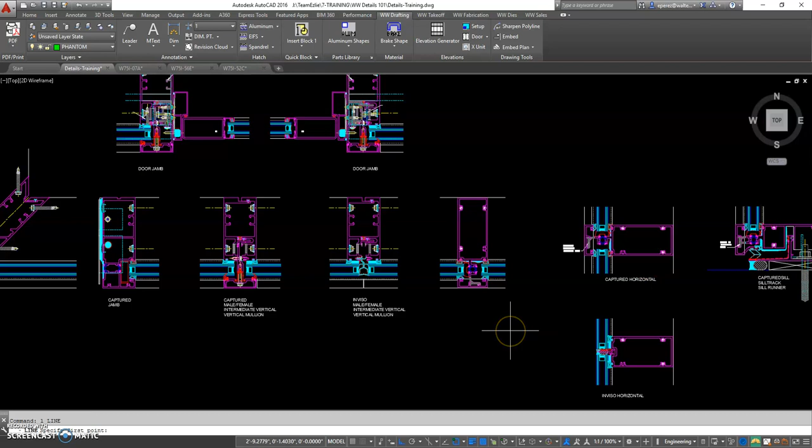So what I did here was take our captured horizontal and rotate it so we could see how it aligns and mates with the vertical members. For visual purposes, I'm going to draw a line showing what every line represents on the verticals, and then we'll do the same vice versa on the horizontals. I'll show you what I mean.

Okay, so this is our horizontal, rotated. It should line up in the back to our verticals, so I'm just going to draw that line there. That's the back of our system. You'll see that the actual part of our horizontal is actually a bit smaller than the back of the system. This is correct.

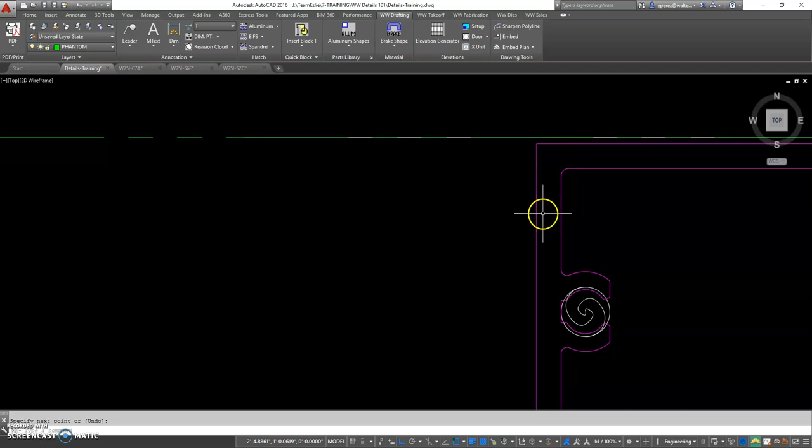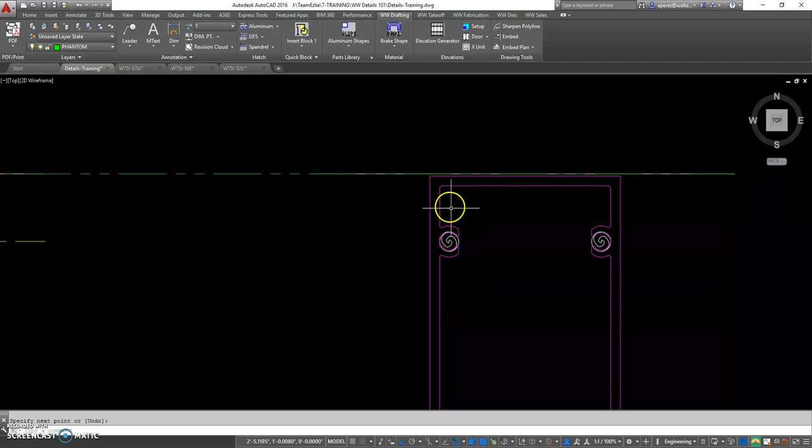This is a design intent, so that this allows for a little bit of wiggle room in assembly, as well as die tolerances, so that this horizontal will never exceed and stick out past the verticals. So this is correct, this is on purpose. It should be 0.02, I believe, is the number we typically have as an offset.

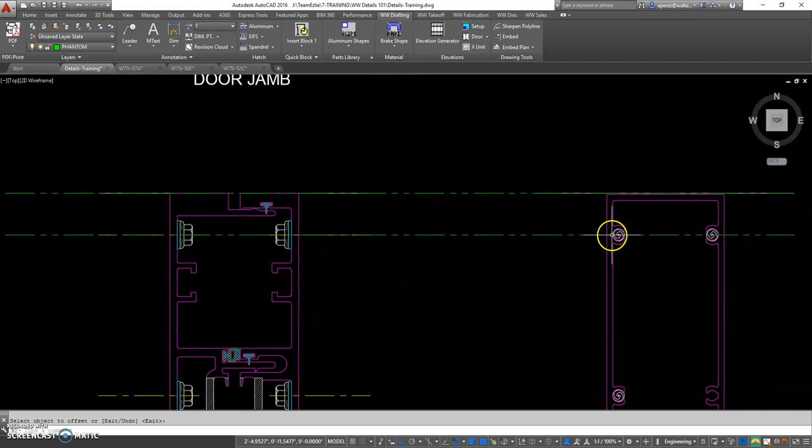Now I'm going to offset this line to the assembly screws, going to the center of our screw raceways. Okay, so that is our assembly screws. That should align with these on our verticals, because that's representing this screw attaching this horizontal through this screw raceway. So if I go across all the verticals, those screws should align, and that's how we locate those.

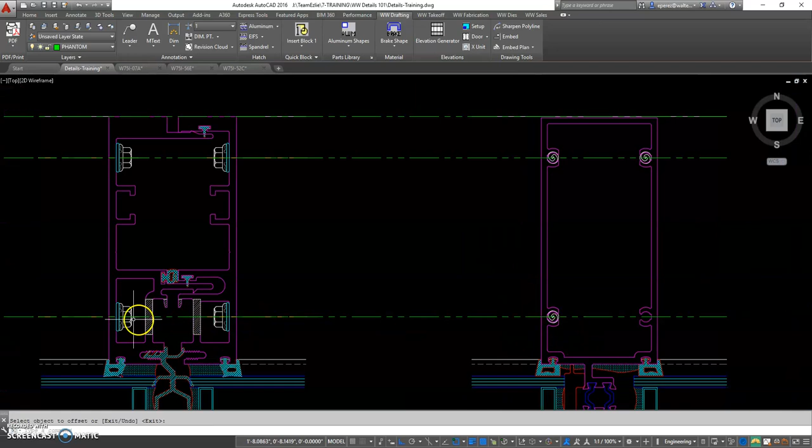I'm going to do the same for the next screw raceway. Okay, and those all should align as well, going across. So that's how the assembly screws are located and why we see these two in a vertical view. Typically our standard is to attach with 2 screws.

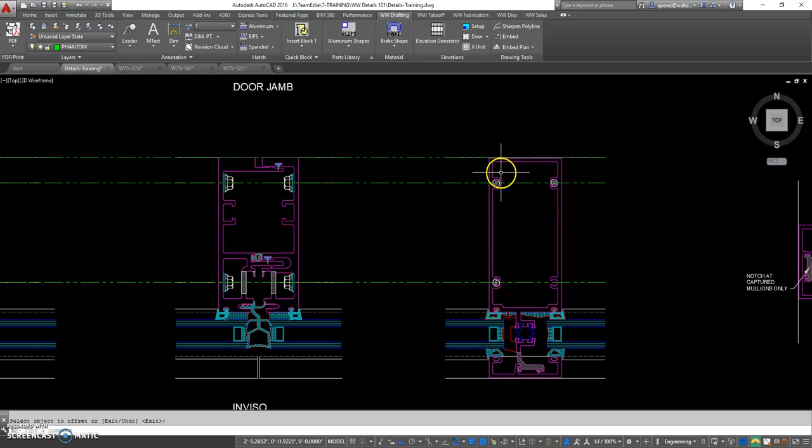The next line you should see is the back of pocket line. If I offset through to the back of the pocket, remember it's right here, the edge of the extrusion. Okay, so that's the next line you see.

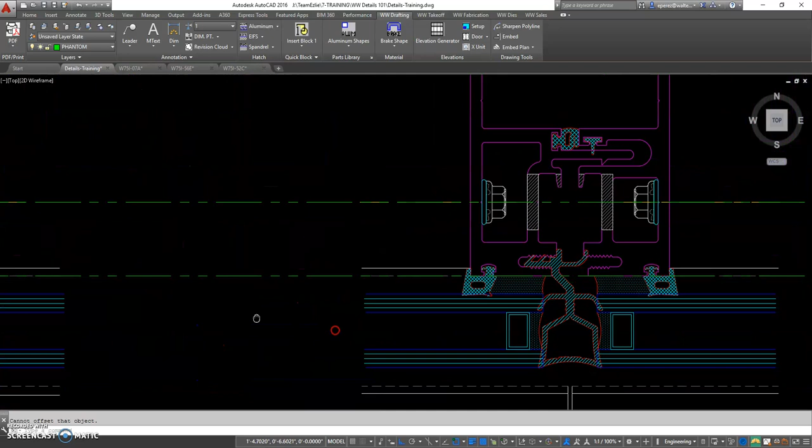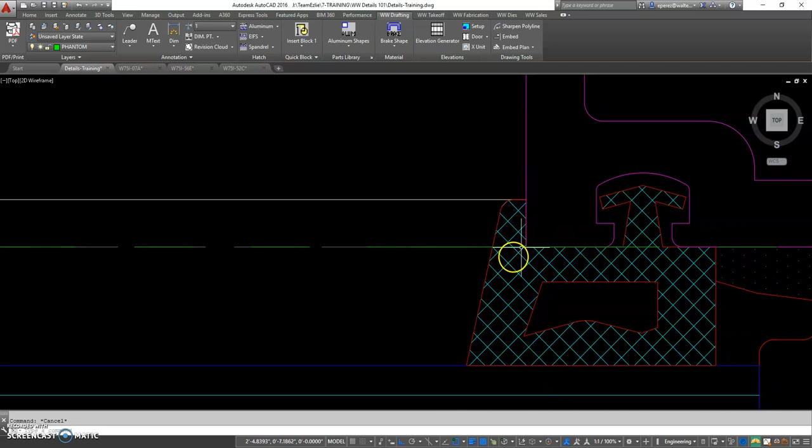Now we're showing them as a hidden line in our details. The reason for that is you see these gaskets here, these back gaskets. They have on them what we call a trim lip. This little trim lip is technically installed on top of the horizontal member, the die. So really, the back of pocket is hidden by this gasket.

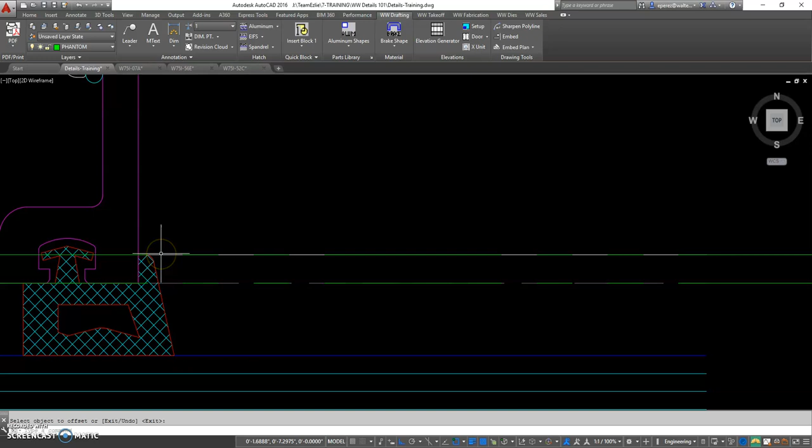So this is why we show it with a hidden line. Then this line here that you see in white is an actual line representing this gasket trim lip. If I offset my construction line to that trim lip, that will align on all of our details, as you can see. So that's why you see that solid line back here, and then a hidden line represents the back of pocket.

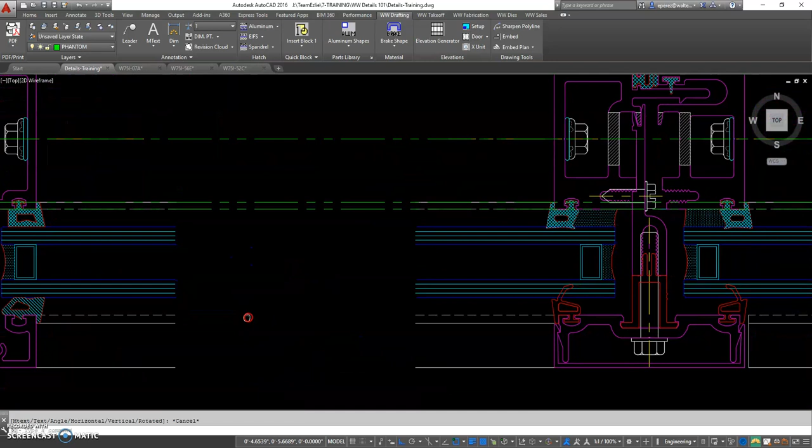Our standard dimension from back of pocket to back of glass is 1/4 inch. Right now, that's our standard, and that should never change. But I can only say never once, because sometimes that does change, but our standard is 1/4 inch.

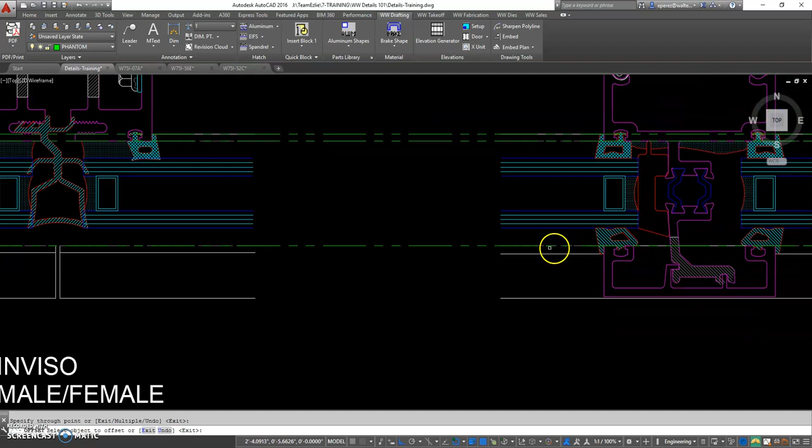Okay, so same with the front. If I offset my construction line now to the face of the pocket, again, it's shown as a hidden line because horizontally we have this trim lip on the gasket. So you have a hidden line for the pocket and then a solid line for the trim lip of the gasket. That's what we're seeing horizontally.

Our standard dimension from back of pocket to front of pocket for 1 inch glass is 1.5 inches. That's our standard. So 1/4 inch plus 1 inch plus another 1/4 inch gives you 1.5 inches. That's our standard.

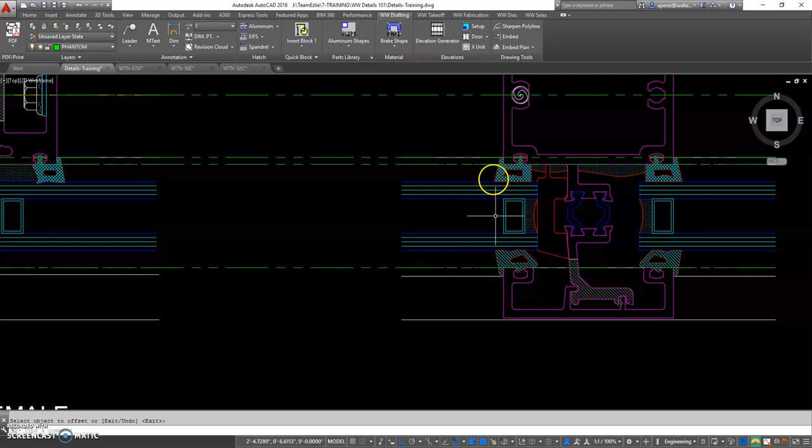Okay, and then the next line would be the face of system. So again, I'm going to offset to this line, and again, you'll see our horizontals are purposely short. That is on purpose, that is intentional.

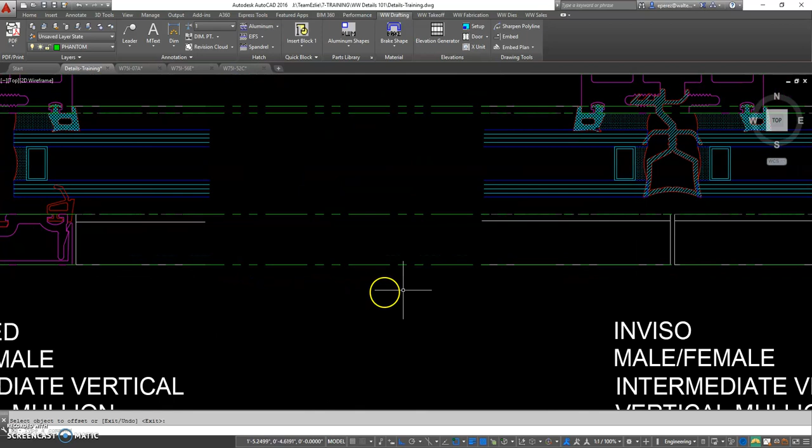Face of system is typically at our verticals' face, which is truly 7.5. So face of system is driven by the vertical face and back of system. Our vertical mullions are driving the overall system depth. So our standard is 7.5 by 2 3/4.

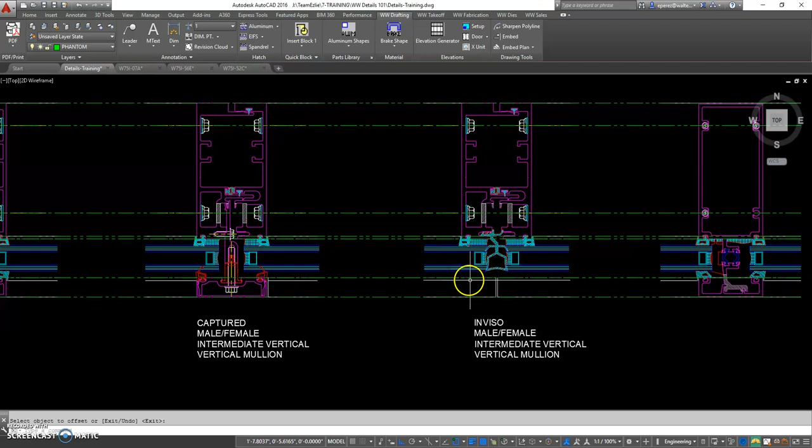Okay, now on the Inviso, you'll see there's some extra lines here. These lines represent the splice of this horizontal cover, face cover. When the two units meet, we leave a gap.

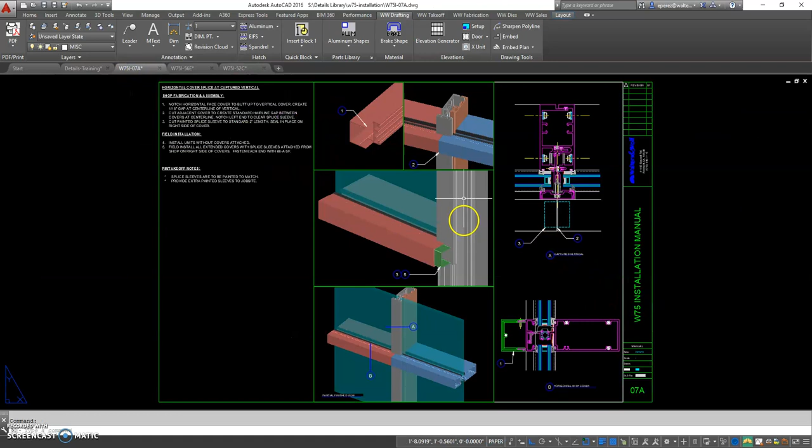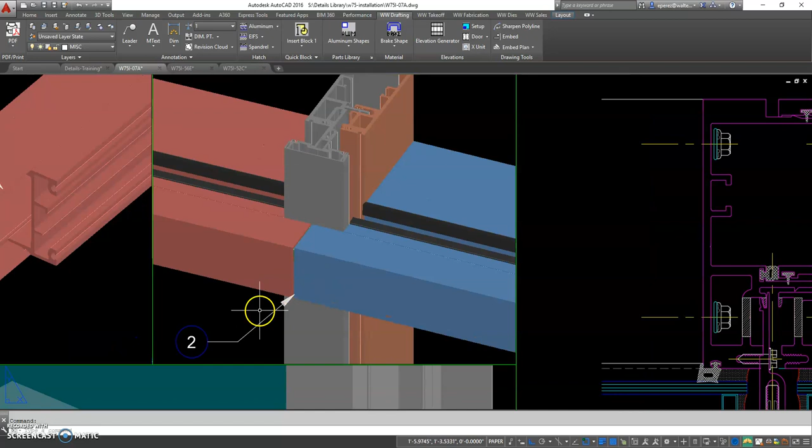So I have this little ISO of a deeper cover, but the same concept applies. You can see this cover in my vertical view, looking down on it. Here's that cover, and there's those lines, which represent this finished little gap we leave. That's our standard, so we show it in our 2D details, so everyone knows there will be a little gap from the face horizontally. That's what those lines represent.

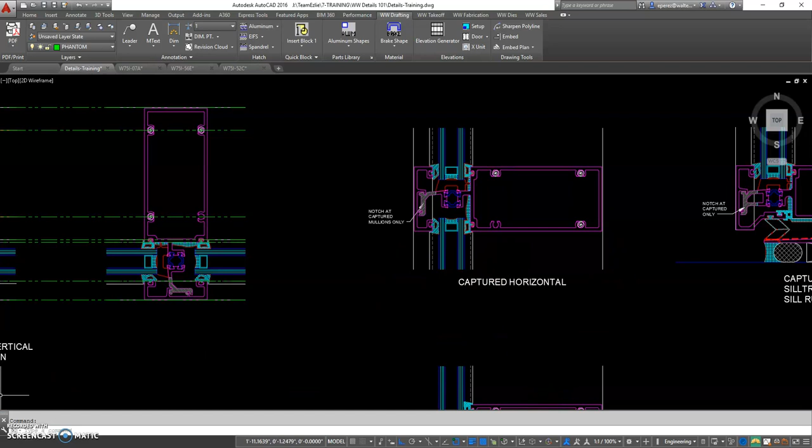Okay, so now that we did that on our horizontals, I'm going to pause and then we'll jump and do the same thing with the verticals so you can see how those lines align with our horizontal details. So now I did the same thing. I took our vertical detail and rotated it sideways so we could see how it aligns with our horizontal details. So again, I'm going to start with the back of system.

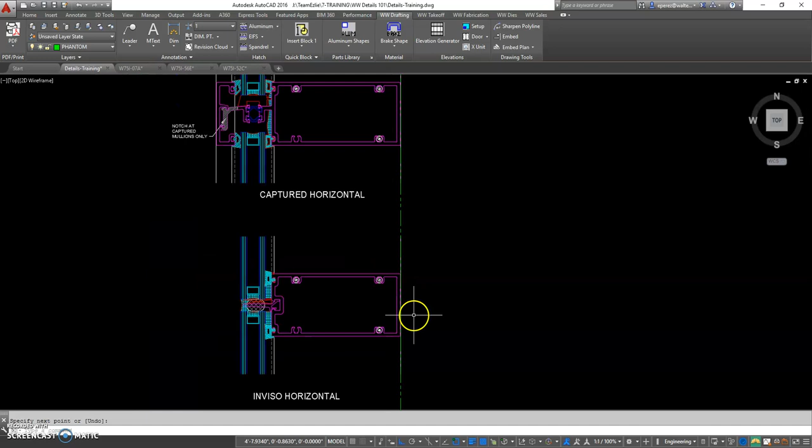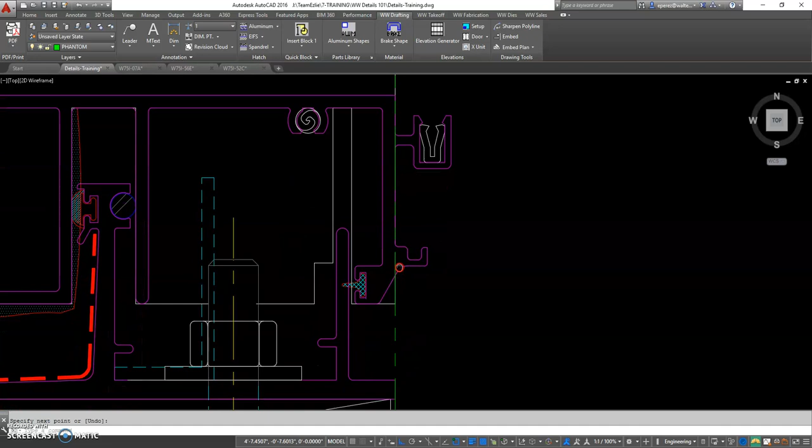Okay, so you should see that same offset horizontally. The one that does not offset is the sill when it has an SRT hook. This is what we call an SRT hook, because this receives an interior closure trim, so those need to butt up nicely to the system. We don't want to have that offset here, so that's one thing that is intentional. Okay, this is our sill track, and it also butts up to the back of system.

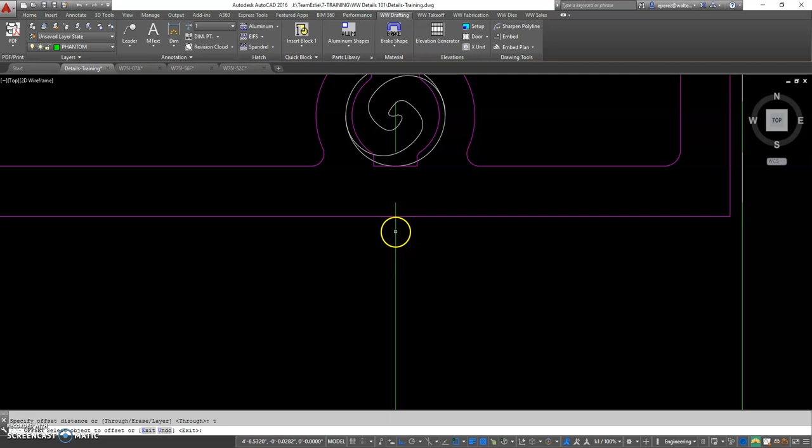Now I'm going to again go to the center line of our raceways. They all should still align. They're all the same dimensions, and they should all line up with the verticals.

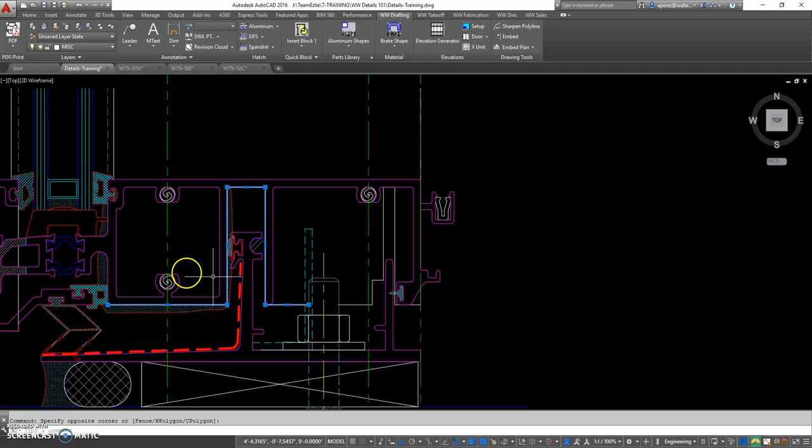Now you'll see on the sill there's some extra lines here - these lines here and this line here. That represents the notch that occurs on the bottom of our vertical members. The vertical members have to be notched to go up and over the chicken head, as well as this back leg of the sill for installation. The notch is large enough to allow for up and down movement. Our sill typically is a wind load connection, which means the verticals are allowed to move up and down.

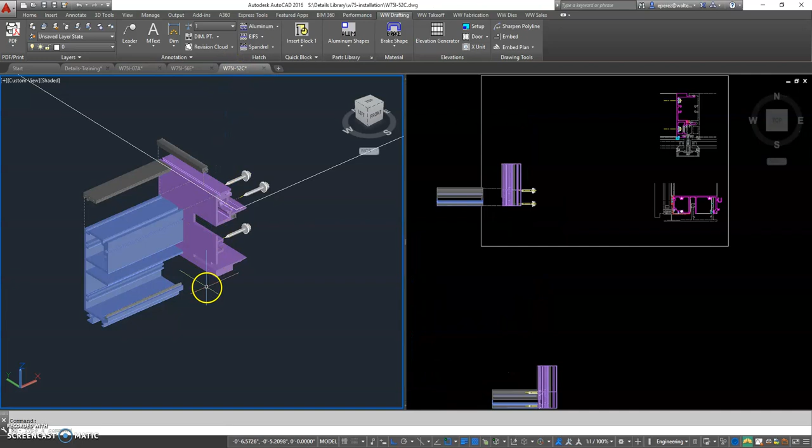So I have an ISO here that shows you what that notch looks like at the bottom of our vertical when it attaches to a sill.

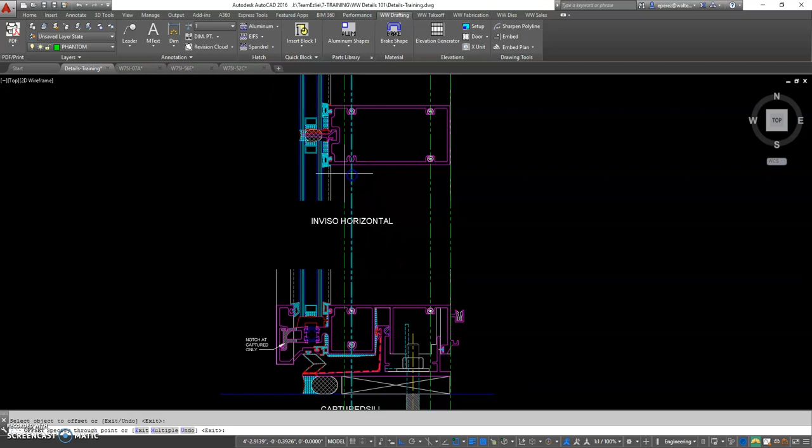So then I'm going to keep going to the next lines, which will again be back pocket. So all that aligns - again, quarter inch gasket, one inch glass, another quarter inch gasket, so 1.5 inches should be where this face of pocket is. That's again standard, and it all should align with the vertical.

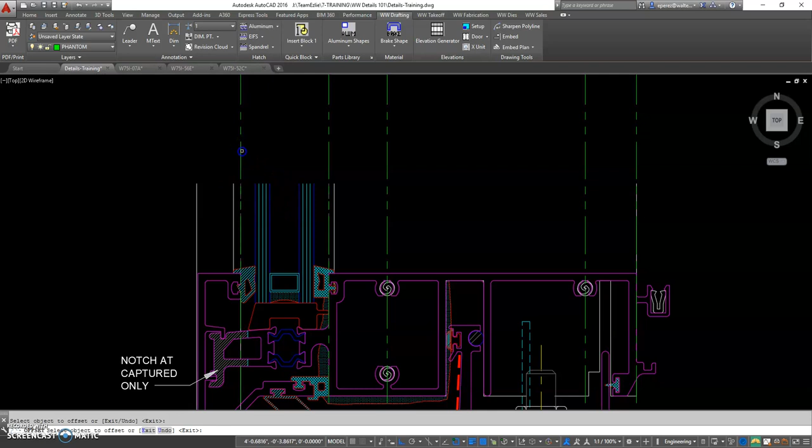And then the face of system, which is the true 7.5, and again the horizontals are short, but they all should align up.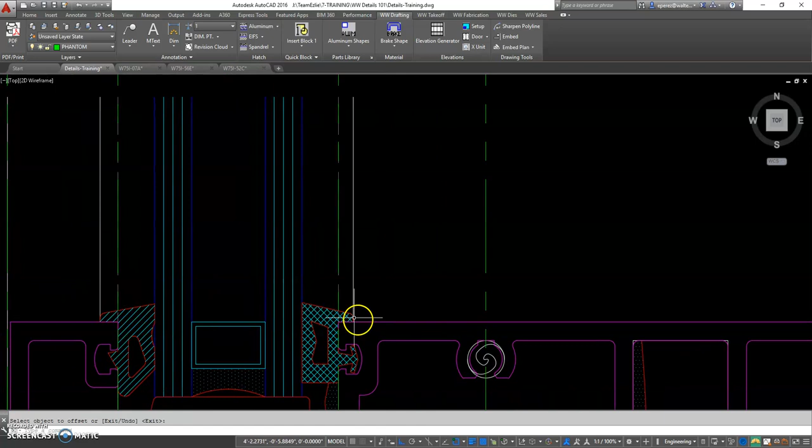Okay, so same thing on the horizontals. We're showing the pockets as hidden lines because of these trim lips on the gaskets. That's why you're seeing solid lines offset a little bit.

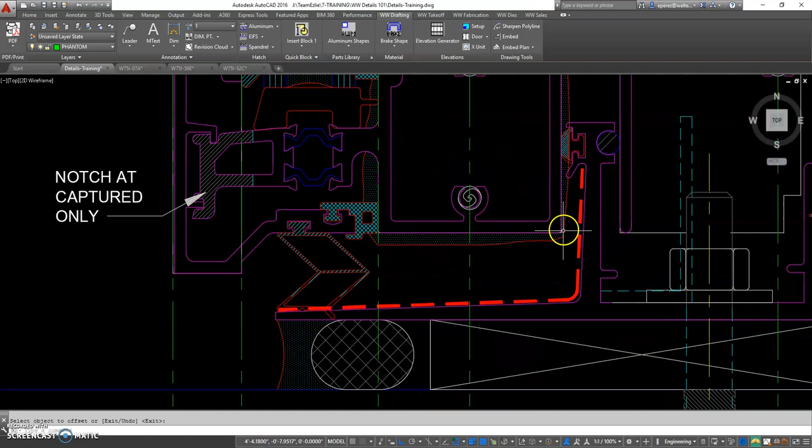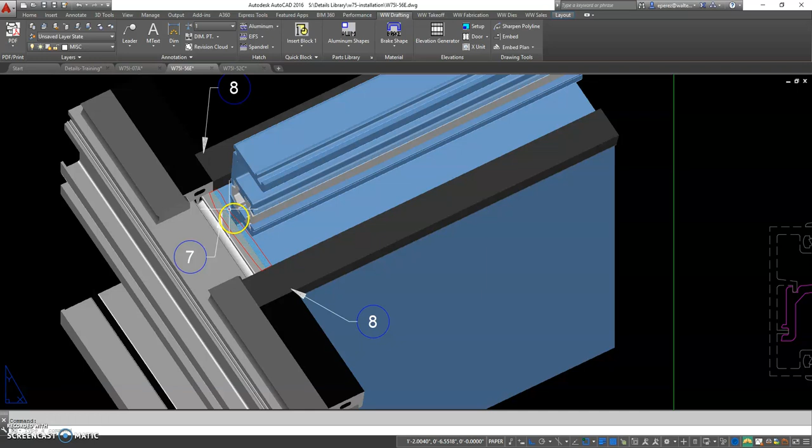This sealant that you're seeing here on the horizontals and the sills, this is what we call our assembly seal, or joinery seal. When these two pieces mate together, we put sealant between the metal to metal. So I have this ISO here to show you when a vertical member butts up to a horizontal member, right between the two pieces, we seal all that up. We show that in our details, and that's what you're seeing here.

And here, this is the vertical - excuse me, sorry, not to confuse you - and here down at the sills. That's normal. That is going to be on all assembly details because that's how we make sure it's watertight when the two pieces get screwed together. And all that happens in the shop.

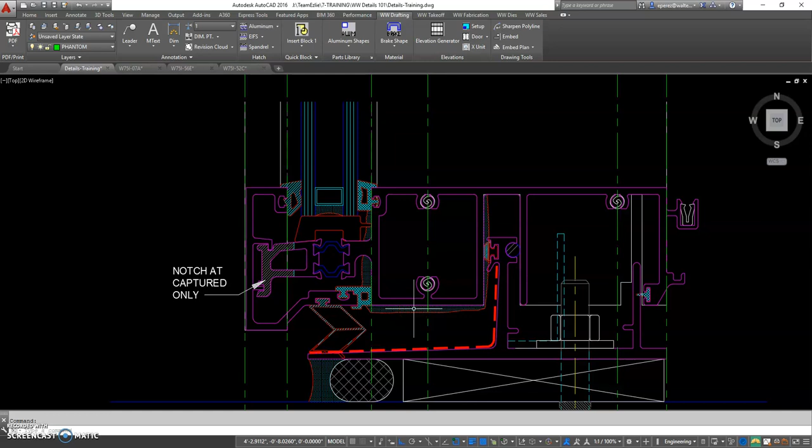This hidden line is what we call an index clip. We have an installation manual sheet now for that, so if you're curious how that works, it occurs at each vertical. That's why it's shown hidden, because it's technically beyond.

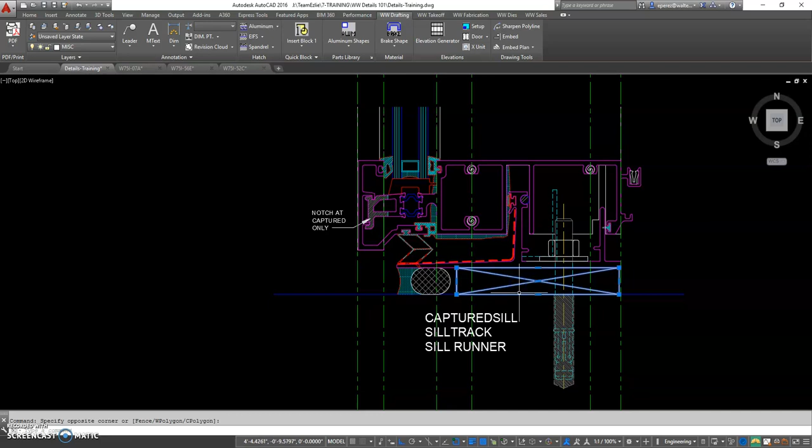And then we have our shim stack, which is plastic shims. And then we have our perimeter sealant or perimeter seal. This hatched object represents what we call our backer rod or foam rod - it's just some foam. And then this pattern represents our sealant.

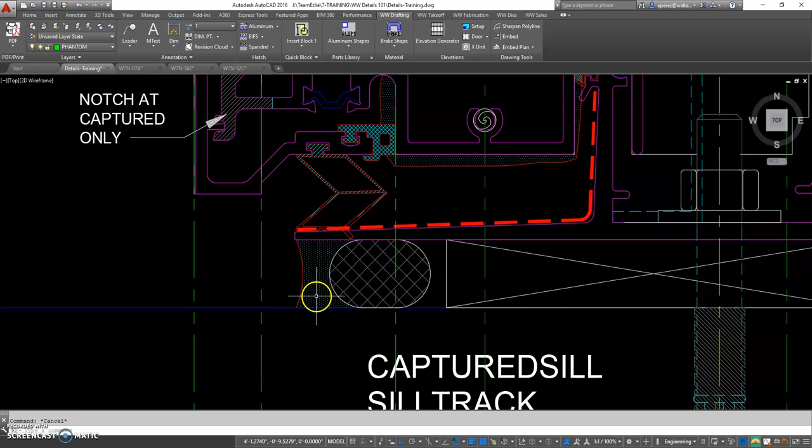All right, so that's the basic overview of our vertical and horizontal alignment and what the line work is showing in our 2D details.